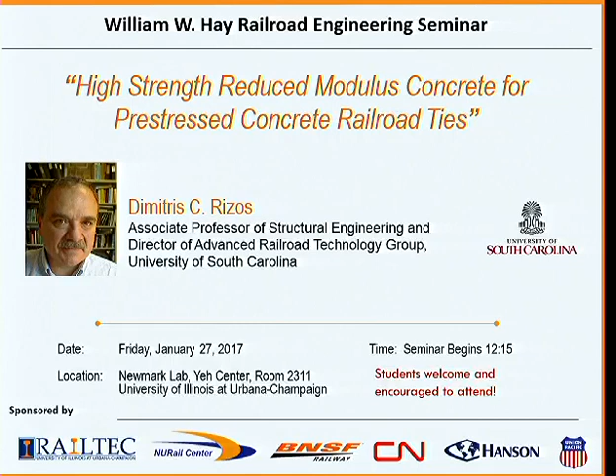Here's a quick overview of the university. We have 8 campuses, more than 45,000 students. The main campus is in Columbia, South Carolina. Beautiful places, smiling faces. Those of you who joined the JRC conference last year, we hosted it. We're very proud of you for being there.

So 14 schools. It's breaking up, I think. We have more than 300 degree programs, 30,000 students in the Columbia campus, and approximately 1,500 faculty. In our department, we have the main traditional areas: transportation, geotech, structures, water resources, structural engineering, of course, and railroad engineering, which is the latest addition to our program.

So the objectives were to establish a nationally recognized research and education program in rail engineering that is a nucleus of excellence within the department in USC, and to support the industry and promote railroads both in South Carolina and the US.

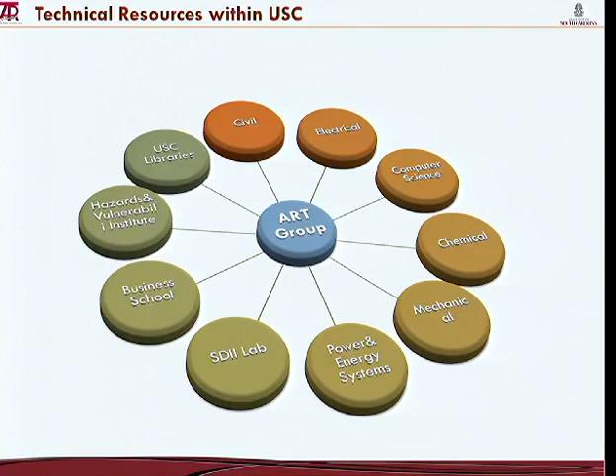The ART group stands for Advanced Railway Technology. A little bit on the history: the seed was planted in 2008, and we used, at the time, a proposal to NSF on high-speed rail vibrations to develop methodologies to predict them, basically.

To start doing... That's the train coming. No. So, can everybody hear me now? Better? I can yell if needed.

In 2010, a catalyst was the REES symposium, which I think was here in, it was in Kansas City actually. And the JRC that year was also here at Illinois, where I was asking questions: where can I get material to teach railway vibrations? And one thing brought the other.

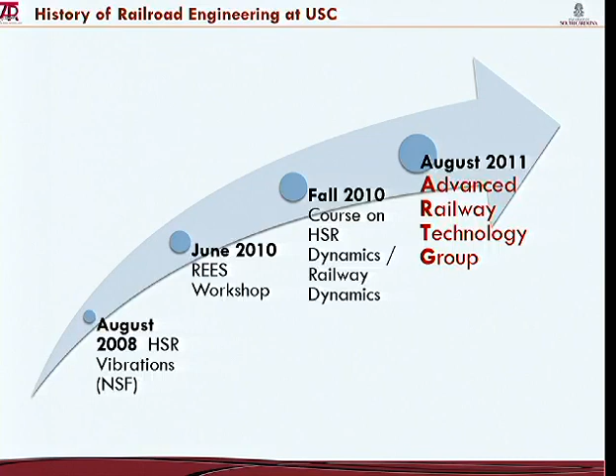Before we knew it, we embarked on a trip that was both adventurous but also very satisfying and rewarding. Fall 2010, the first course in high-speed rail dynamics was introduced in the curriculum. August 2011, the group was formally, officially formed.

We spent the first year establishing and developing our curriculum, building a research program and getting a little bit of funding in place. Since 2015, we have advanced degrees in rail engineering: Masters of Science, Master of Engineering, PhDs, as well as a graduate certificate, a 12-credit-hour graduate certificate offered online.

So these are the courses, real quick, that are available and the semesters they are offered. The first group of courses are directly related to rail engineering, dedicated to rail engineering. The last group, multimodal transportation systems management, risk analysis, and human resources, have rail components, and all are part of a graduate certificate as well.

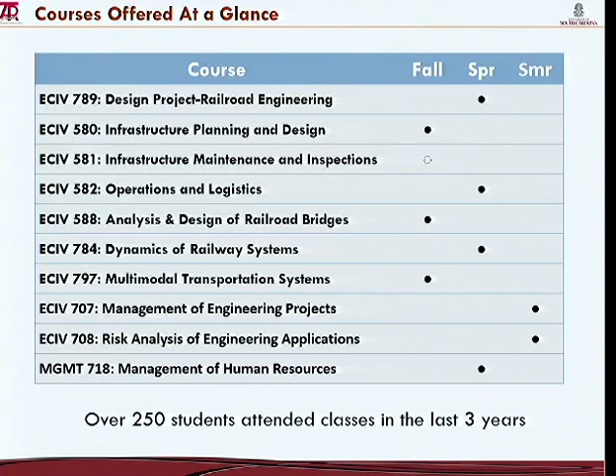We had over 250 students who have taken the courses in the last three years. As I mentioned, all these courses are offered online through our Apogee program, which is a program of graduate engineering education. It was probably one of the first programs in the country back in the early 80s, and at the time the operation was through videotapes.

Nowadays it's live streaming and also available at any time on demand. We also follow the model where the instructors don't have to be in class, so we do have remote delivery of lectures.

Some of our research facilities, especially all the resources that contributed to this project: our structures lab, of course, doesn't compete with what you guys have here.

I mentioned a couple of people had been to the lab about 20 years ago. Today, when I revisited it, I remembered why I was impressed at the time, and I'm still more impressed today.

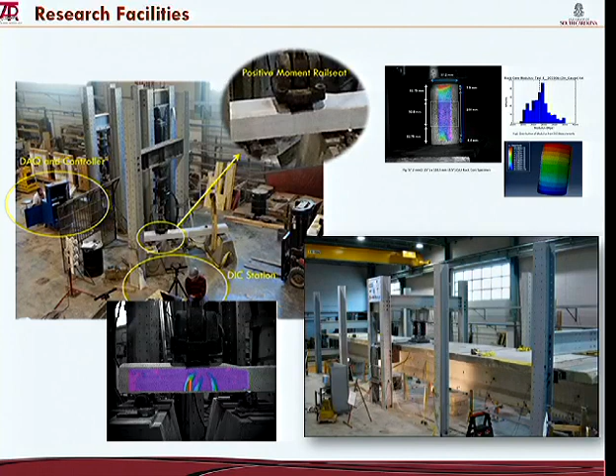We do have the capabilities for full-scale testing, some tie testing that goes on here. We have advanced measurement systems based on digital image correlation techniques. We'll talk a little bit about this - we use it both on large-scale specimens and also for material testing. And of course, all the computing, modeling, and simulation capabilities.

A couple of words on the digital image correlation system that we used. These systems are for 2D and 3D visualization and image correlation. This was developed at the University of South Carolina about 30 plus years ago by Professor Mike Sutton in the mechanical engineering department.

Of course, this technology moved into the industry. Correlated Solutions is a spin-off company out of this technology, and we're using their software and hardware for our testing. So it's a proven technology that has been applied to other industries like, for example, aerospace. Boeing is in Charleston doing a lot of work with measurements.

The typical 3D system consists of 2 cameras and a computer setup, as shown here. It seems like a simple configuration, and it is. The procedure to analyze the data, of course, is what makes the difference between different systems available in the market.

What is common is a speckle that you need to apply to the surface you need to measure. In this case, we have our sample, and the cameras are looking at the sample. It's pretty much like human vision, so you need to focus on the specimen. You need to keep the relative distance and position of your eyes fixed to a specific point. Otherwise, you lose the information.

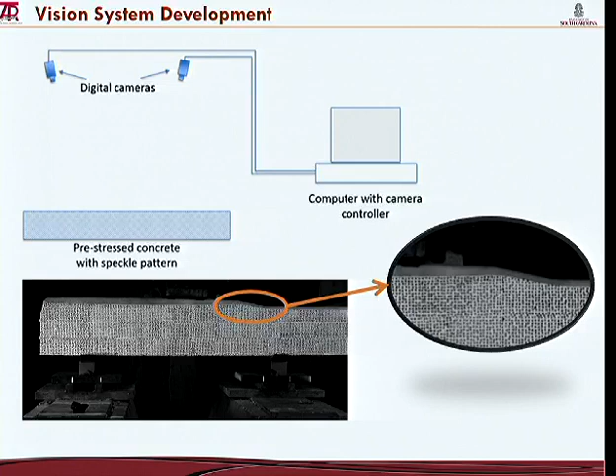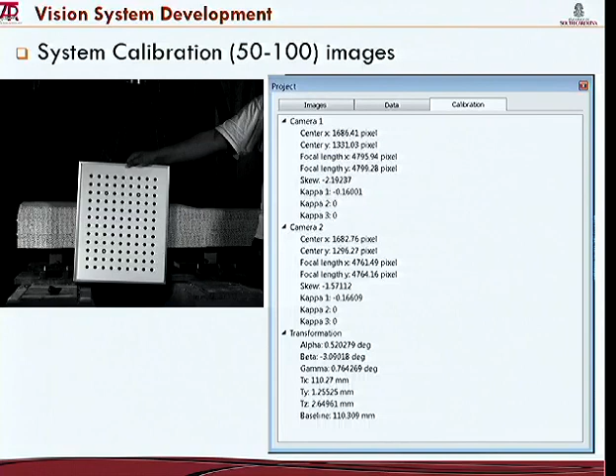The system is calibrated, and you get all the geometric parameters of the cameras as far as location, orientation, angles, and so on. The procedure works with 2 cameras taking images of the same specimen, same field of view, or at least a very similar field of view, same object.

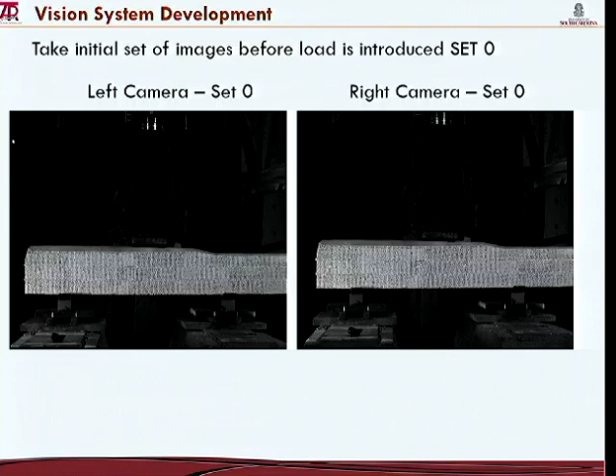Once the system is calibrated, the first set of images is taken at the undeformed or baseline state. Then you load the specimen, creating a deformed configuration, and then you correlate the 2 images. Pretty much you're tracking, not dot by dot, but in a statistical way, a number of points within a square, and you move that across to track them in space.

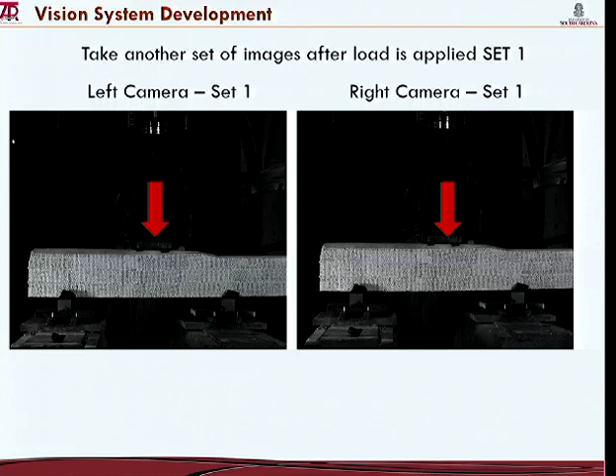You compute the full 3D field, so we compute displacements in all 3 directions. Of course, you can post-process them and compute the strain fields. This has been used extensively and has been validated in the lab.

Here is one of the validation tests I will show you today. This is a prestressed prismatic beam, and the objective is to measure the strain on the top surface of the beam when the strands are released. These are small strains, so you need an accurate and noise-free system to get the required accuracy.

The cameras are attached here on the top. Here's a detail of this: 2 little tiny Point Gray cameras shooting straight down into the face. They don't have to be perpendicular, unlike the restriction with 2D systems.

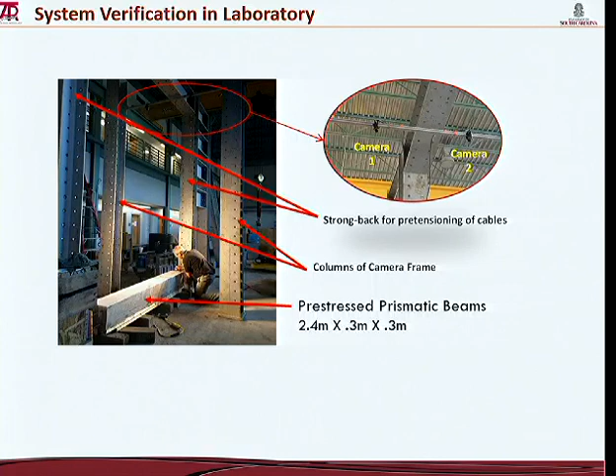We take a set of images before the strands are released, after the concrete has cured, and then again after the strands are cut. In this test we had a flame cut — we had to flame cut the strands — and these are the images that were obtained, where the top 2 strands were cut first, and then all 4 strands were cut.

Average strain was 110 microstrains in the first case, 180 in the second case. So here we're talking about real low strains.

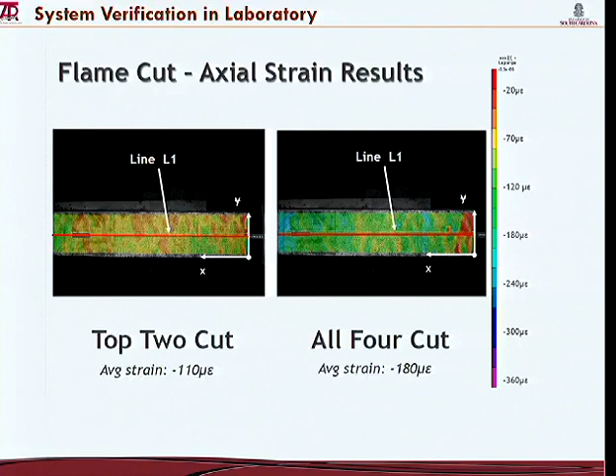Now, if we plot the strain field along the center line shown here, line 1, the blue dots or triangles show the strain results, and the solid line is an average. The bottom line is for stage 1 when the 2 strands are cut, and the top line is when all 4 strands are cut.

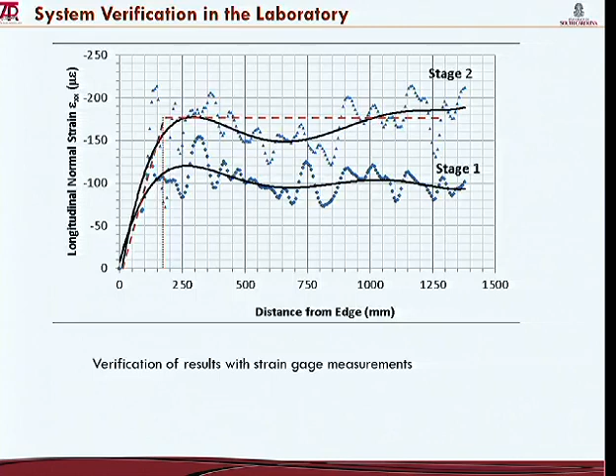These numbers have been validated with strain gauge measurements — of course, strain gauges are like spot measurements.

With finite element analysis of that same specimen, this graph shows the longitudinal strain once again along that line as a function of location from the live end of the specimen. The dashed line is the finite element solution, and the solid line is the DIC average value of this data.

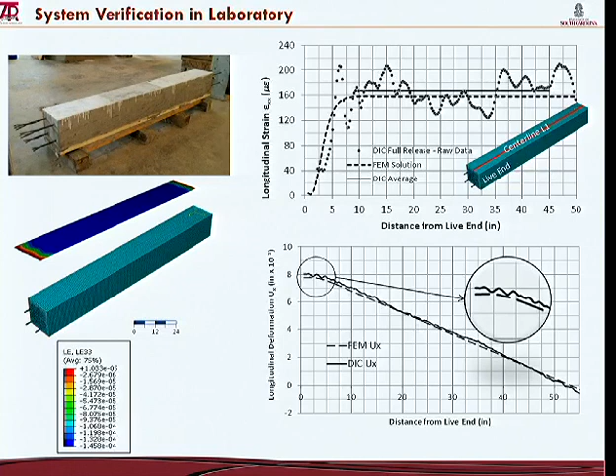And when we look at the displacement, the longitudinal deformation up to the midsection, this is pretty much what we captured here — we see the accuracy of the method.

Now that this measurement technology was introduced, I would like to discuss the design of high-strength and low-modulus concrete crossties, a project funded by the Federal Railroad Administration, now in its third year. We'll touch on the historical background and how the idea came about, the hypothesis, material development and characterization activities, the design and fabrication of prototypes, testing and qualifying the product, and then demonstrate the benefits of this product through a series of investigations.

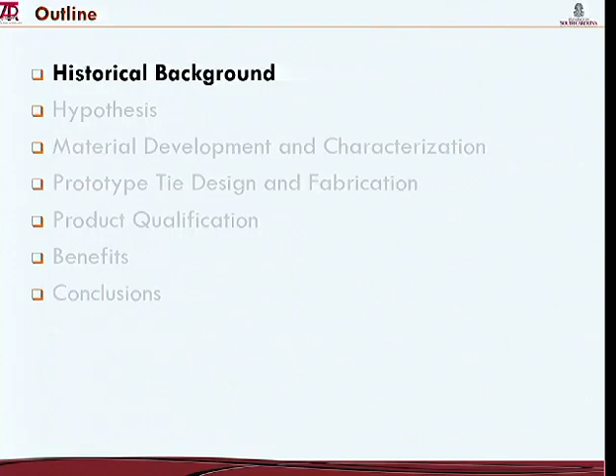Some history on the project: back in early 2000, we at the university were part of a team investigating different concrete mixes to qualify them as high-performance concrete for highway bridges in the state of South Carolina. We used local aggregates and standard South Carolina DOT mix designs.

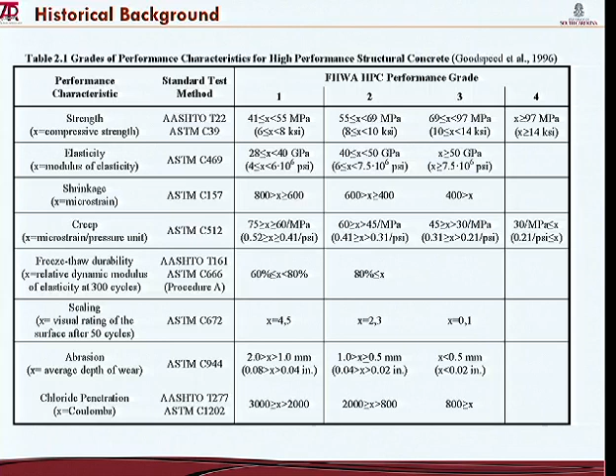Based on the classification for high-performance concrete, the material is classified into four grades based on different properties. What we found is that certain mixes, using aggregates from certain sources, satisfied most of the criteria for grade 1 or 2, except the modulus of elasticity, which was 30 to 50% lower than expected. However, the strength of that material was up there along with all other batches.

So at the time, that material was rejected. Later on, when I started getting more involved with the rail industry and found out about the cracking problems in ties and so on, the idea came about: here I have a product that can produce a more flexible structural member, as strong as the concrete already used. So maybe it's worth investigating this material and finding out how it performs in a system.

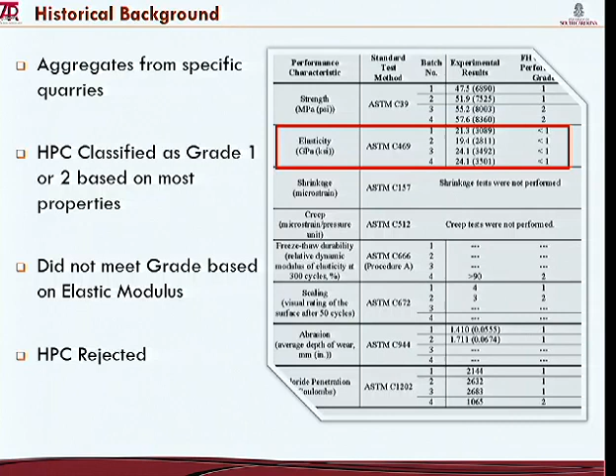Some graphs from this old study, early 2000s, about 10-15 years ago. This top graph shows the correlation of modulus of elasticity with compressive strength for two groups of data. This group is what we call unweathered aggregate, or the standard aggregate that's used - these are granites. This data had to do with batches that did not produce the expected modulus of elasticity, and we found out that all these aggregate sources came from quarries where the granite was weathered.

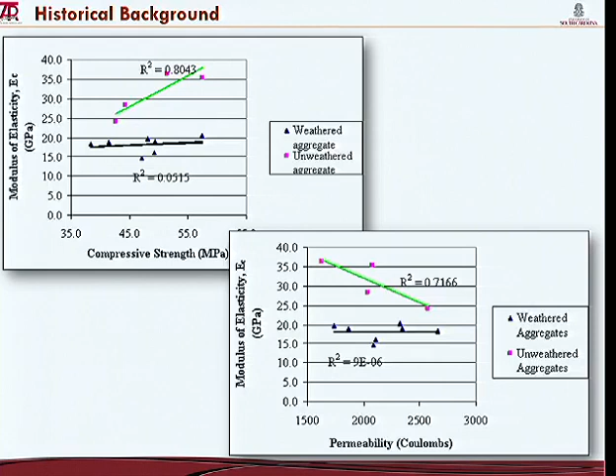Correlation of the modulus of elasticity to permeability - again, no correlation for weathered aggregates, and correlation as expected for the healthy material. So the hypothesis is that if we use such a material with high strength but reduced modulus in a concrete tie, we'll be able to get a better load distribution within the tie, smoother stress gradients because of the higher flexibility, lower stress amplitudes, delay the onset of cracking, and improve the relative rigidity between the ties and the ballast.

Some preliminary studies based on finite element analysis alone show that if we reduce the modulus of elasticity by 50%, then we can reduce the stresses from 15 to close to 50% at different critical locations related to the rail seat, center bending, and under the rail seat at the interface with the ballast.

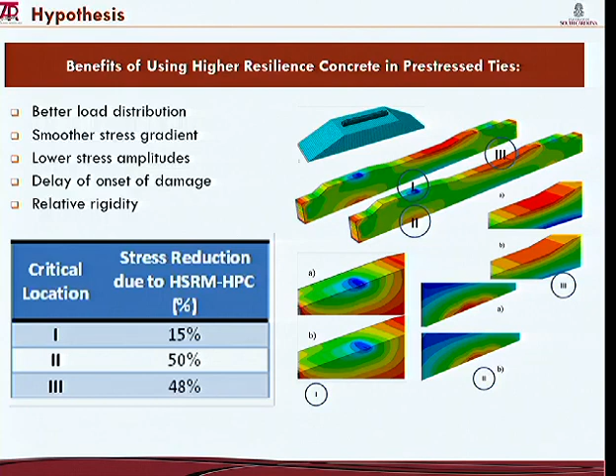So here we departed on developing the material. Major tie manufacture design - the only thing we changed was direct substitution of a material. We just wanted to change one parameter to make sure that what we record in our studies makes sense, and we can find out why.

So the specs: minimum 28-day strength 7 KSI, and strength at transfer 4 KSI. We did direct substitution of aggregates and considered 4 aggregate sources. CA1 is what is used by the manufacturer - that's limestone - and CA2 through CA4 are the weathered granite from 3 different sources.

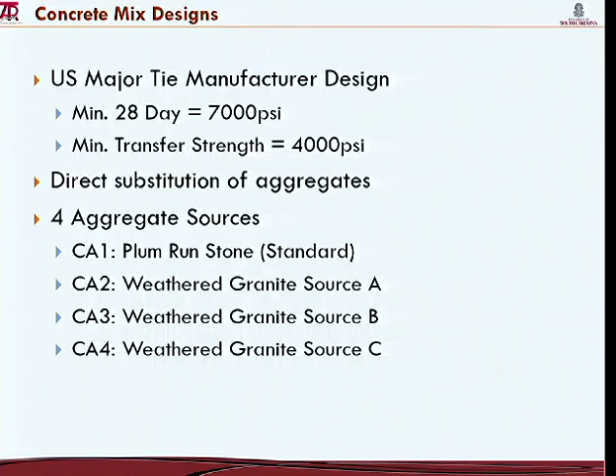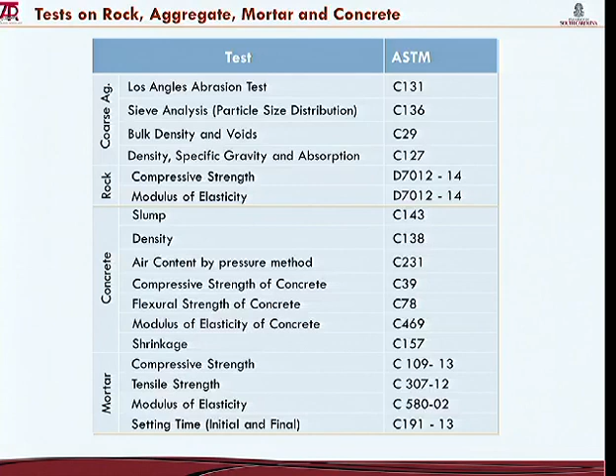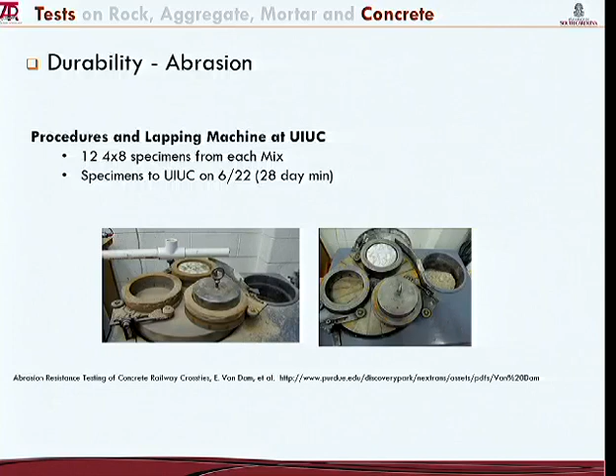In addition to the standard ASTM tests, we did some abrasion tests here at UIUC, and we'll see the results in a second. So this is what we got from this first trial where we mixed the different batches.

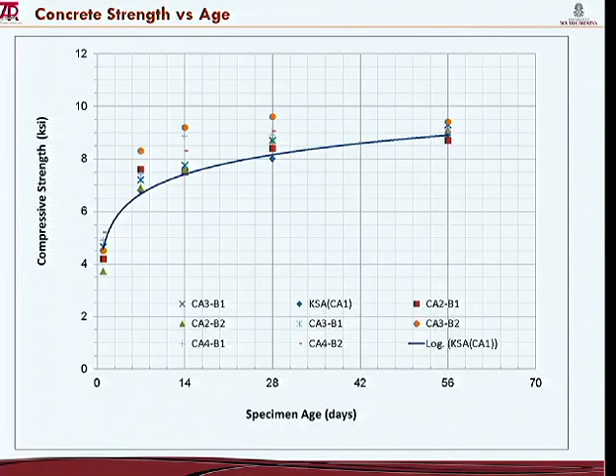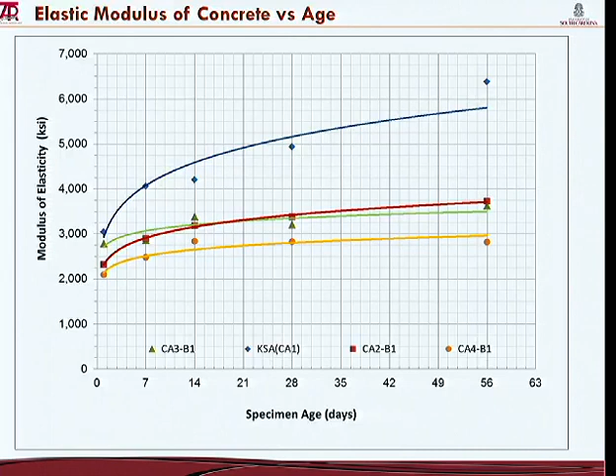When we looked at the modulus of elasticity versus age, we see that the standard design modulus of elasticity follows the trend in the models that we're all familiar with. However, for the weathered granites, the modulus did not pick up. At early times you see a relatively small difference between the moduli, but it seems like a good wine - the older it gets, the better it behaves. So we see higher reductions at later times of the modulus.

Here's a correlation between the modulus and the compressive strength for our baseline, the standard mix, and the weathered granites. These data are plotted for strengths above 7 KSI, which is our design strength for the concrete batch, the minimum design strength.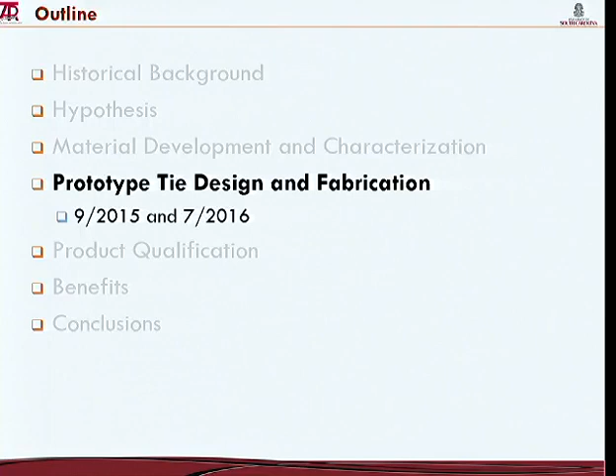So far we've produced concrete twice, one with reduced modulus, one in 2004 and then about 10 years later. Now we'll try a third and a fourth time, but this time we're not producing the mix, the plant will. So we produced ties in September of 2015 and July last year.

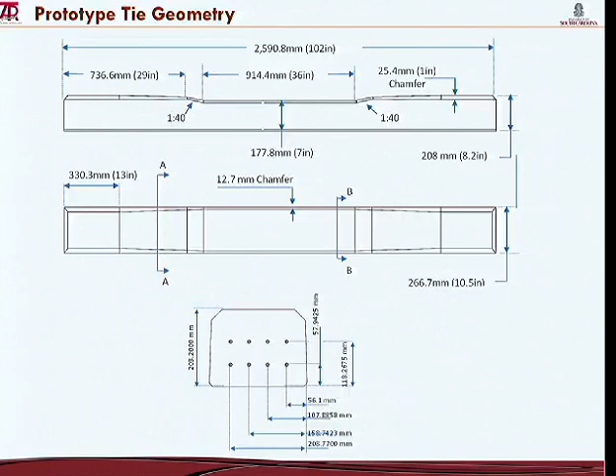This is the geometry. 8 7-wire strands is the reinforcement here, and this is at the plant the first time we visited. The cavity is filled with concrete.

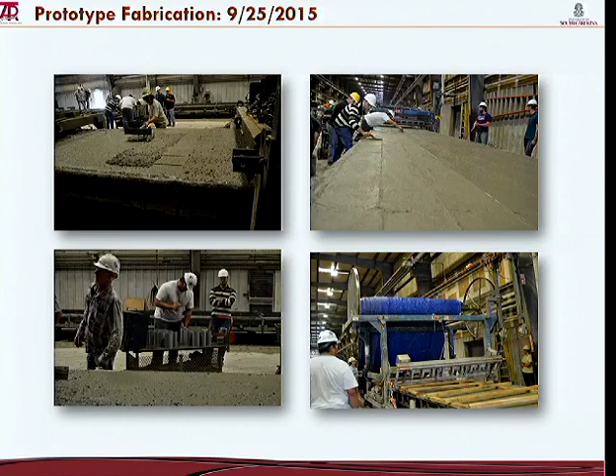Here we do some surface preparation because we will be using DIC measurements to obtain transfer lengths, taking material for testing samples. This is the team with my students. I'm very proud of their work.

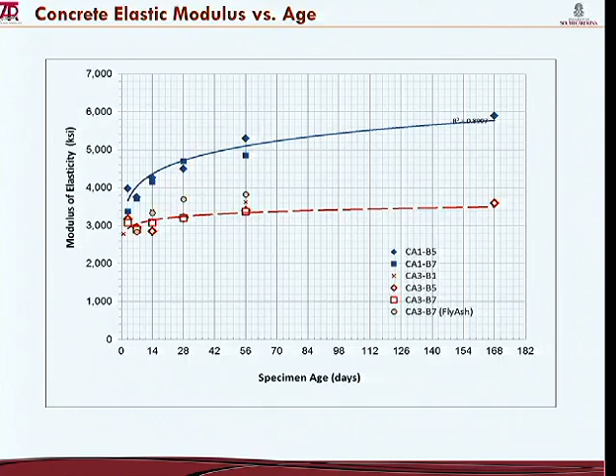And this is the concrete with the weathered aggregates. In these numbers, we also have included one of the batches from our lab testing, just to make sure that we are in the same range of values.

Correlation, same findings as before. One thing that we tried in our second visit, we also produced a batch where we included fly ash in it. This is very limited testing. We're just looking into different possibilities here, moving this work forward.

So next, I would like to show you the measurements of the surface strains. This is the cavity or the bed, the pre-stressing bed, and mix one is the reduced modulus ties that we will be monitoring with DIC.

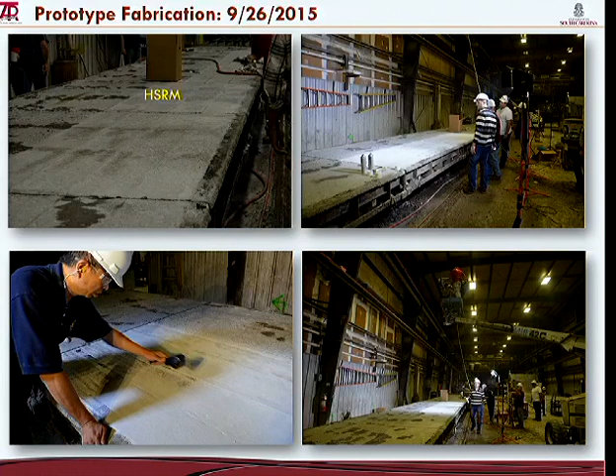So surface is prepared. We see the lighting. We apply the speckle here with a roller, and the system is attached to the lift here. This is a detail, about 17 feet above the surface of the ties, a well-lit surface, and images are taken before strand release and after strand release.

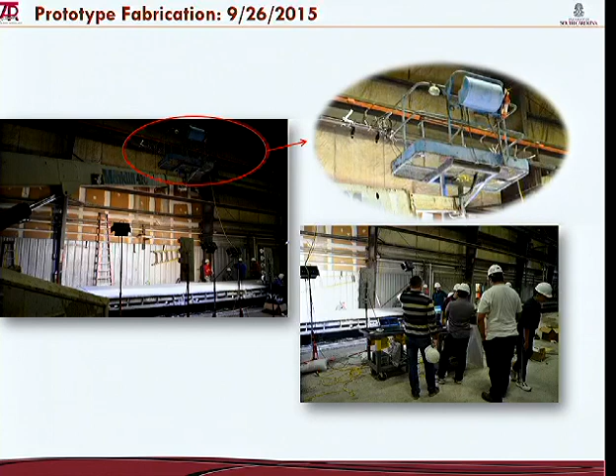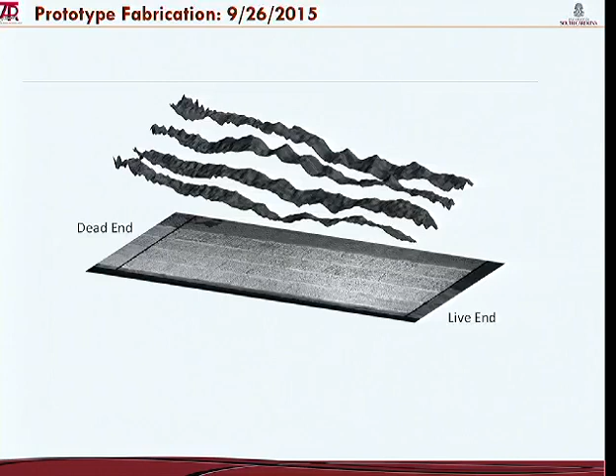One would expect a little bit of a flat area where the transfer length is, and then a straight line, and then flat area again. But we did see some sort of an anomaly.

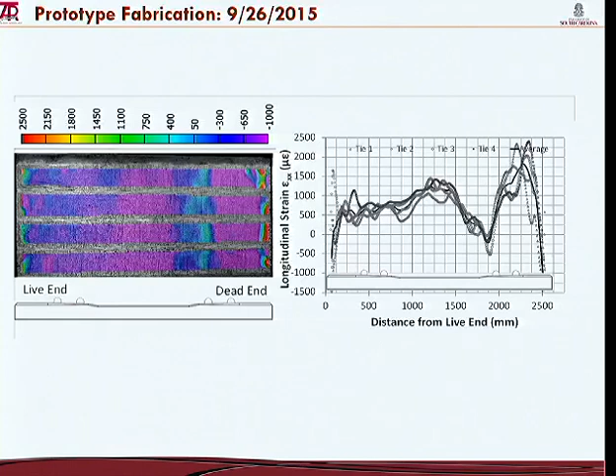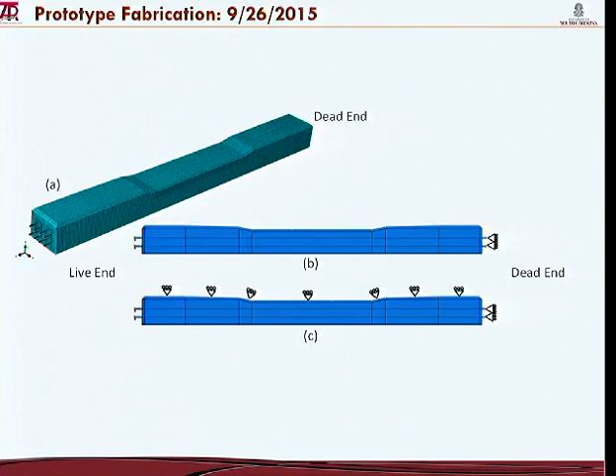So the hypothesis here is that the form is catching the tie, and the form effects need to be also accounted for when we do these measurements. So we tried different finite element models with boundary conditions where the form's boundary conditions are included. And also, let me go back to the image with the pre-stressing bed.

So we can find the stiffness of the form and include these effects. And if we look at the tie without any form effects, we see this nice profile as expected of the strains at the tie underside. But with the form effects, we get a pattern that confirms we were right in our hypothesis.

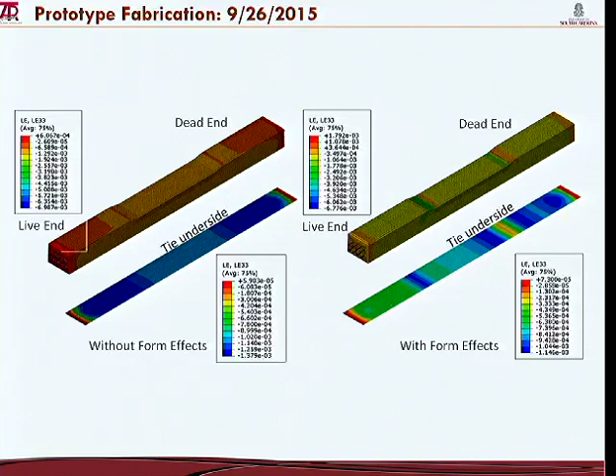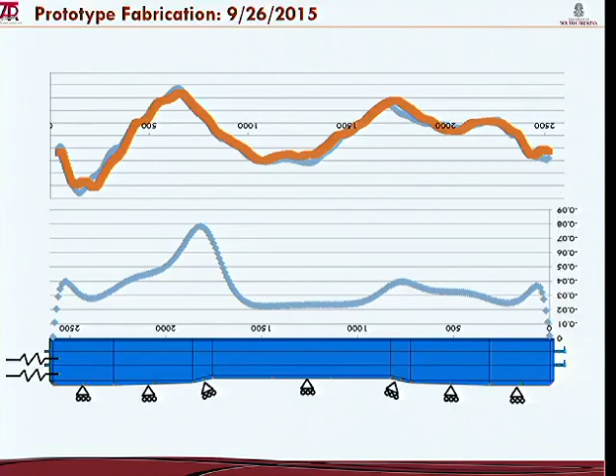If you look at the strain profiles as obtained through the DIC measurements and the finite element measurements, you see that there's something going on at this location, where the rail seat is. Again, direct comparison of the DIC color map with a finite element color map.

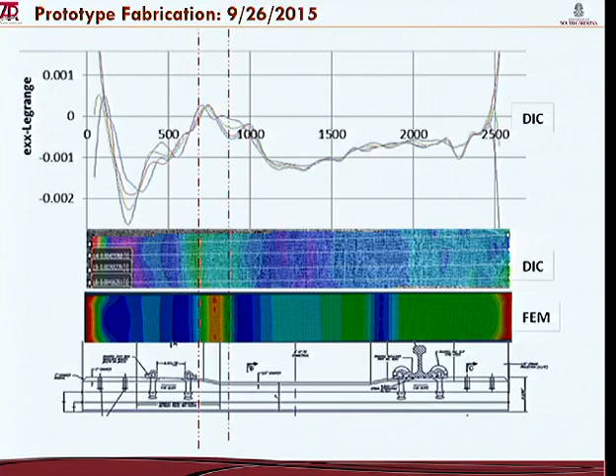We see these effects. Nevertheless, we were able to compute transfer lengths, and it seems that the high-strength reduced modulus ties did produce shorter transfer lengths than the standard ties, and also with a better coefficient of variation. These measurements were not only from our DIC measurements, but were also measured by an independent contractor who was there at the time, using a different DIC system, and also Whitmore gauges.

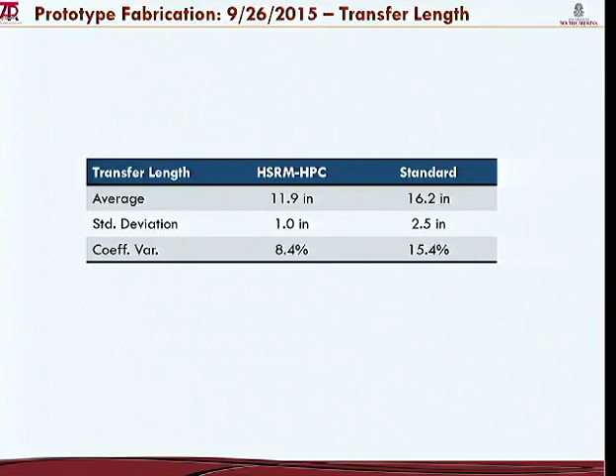So the product was qualified, following all the standard AREMA tests here.

For the rail seat and the negative and positive moments, here we're at the lab. A DIC system also was used for such measurements. The strand slippage was monitored, and the slope deflection was also monitored in all cases.

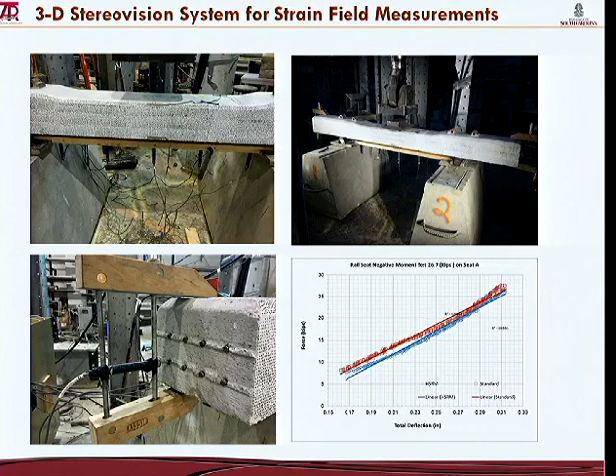We've obtained thousands and thousands of images. I'm just going to show you just a few here, so that everybody can see the benefits of using digital image techniques in strain field measurements.

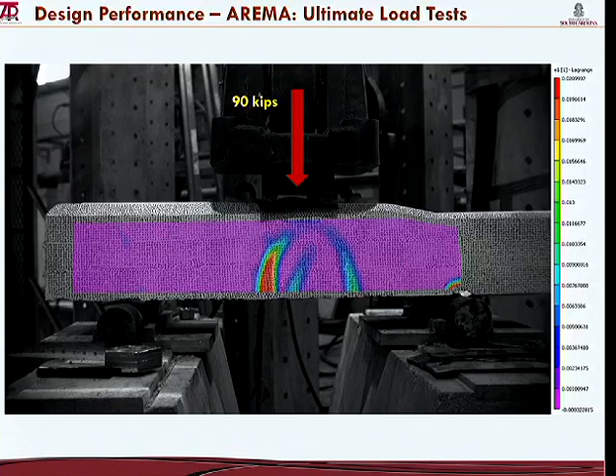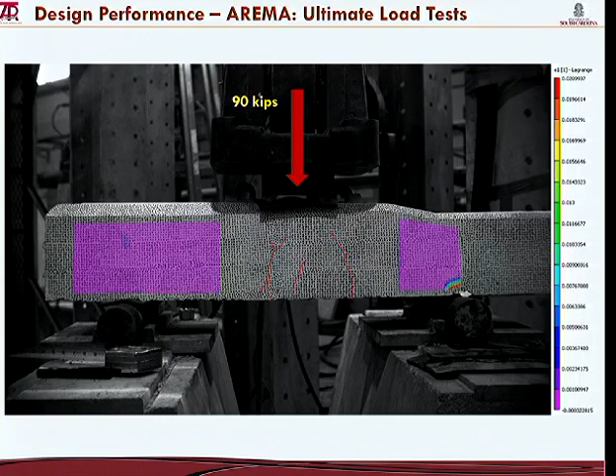At 90 kips load, which is approaching the design ultimate capacity, we see the cracks. Clearly can see the cracks developing on the tie. I just removed the color map, and these are the cracks indeed underneath. We can do all sorts of things in actually measuring and tracking how these cracks open and close through the DIC measurements.

Bottom line, the high performance, high strength reduced modulus ties all passed the qualification tests. The standard, there was one that marginally passed, and we were probably within 1% of the rail seat moment positive value.

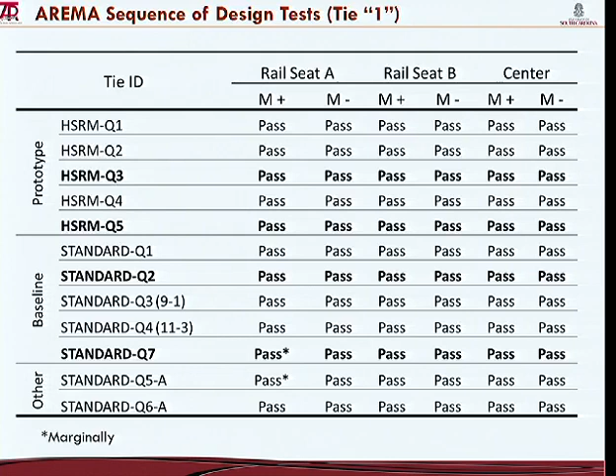Now, when we drove the test to failure, for the prototype ties, the pre-stressing strain is approximately 800 microstrains, 760, 770. And the crack is computed based on the flexural strength to about 320 microstrains, where for the baseline, it's 500 microstrain pre-stressing and 220 microstrain for the crack flexural strength.

So in order to crack the specimen, we need to monitor strains for the HSRM above 1100, and for the baseline above 700. Because remember, the DIC assumes a zero position when the pre-stressing is already applied. So whatever may be monitored or recorded as tension in the DIC, it's not really tension—we have to add the compressive stresses due to pre-stressing there.

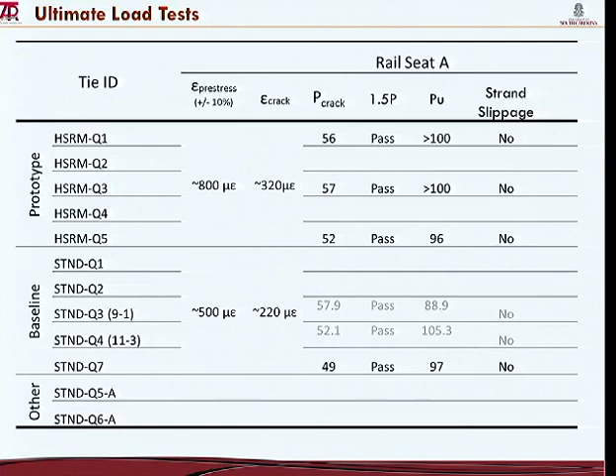Testing that was conducted here at the Railtech facilities on the fastener pull-out and torque test—all the ties passed. Fastener uplift tests—the ties passed.

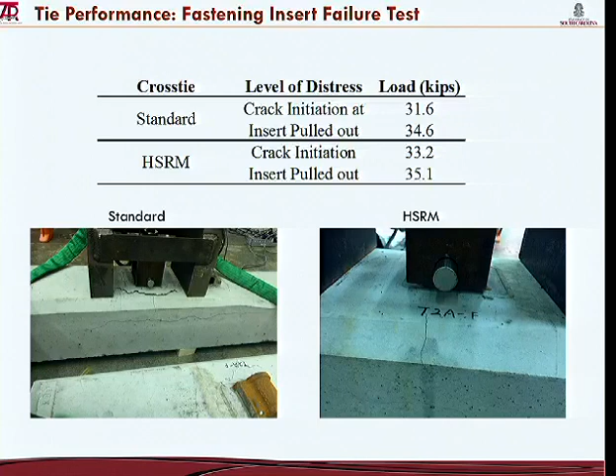We'll discuss the cracking patterns again when we do the benefits now. So now that we have a good product, how am I doing in terms of time?

So now that we have a good product, some variable support testing was conducted here at your facilities at Railtech, for under full support and support conditions that will cause center binding. And of course, as expected, the HSRM is more flexible, so higher deflections, with slightly higher deflections as shown here as a function of distance from the center of the tie.

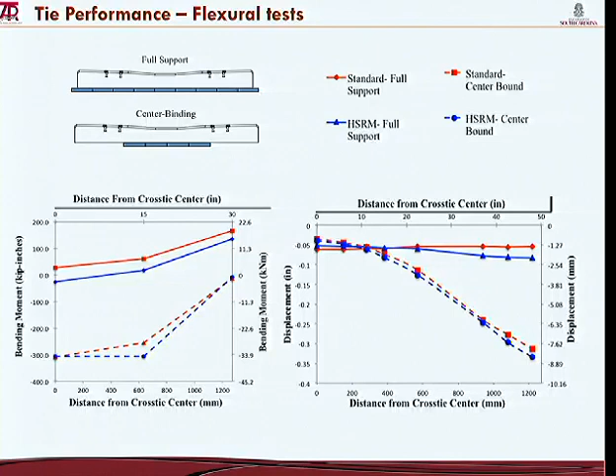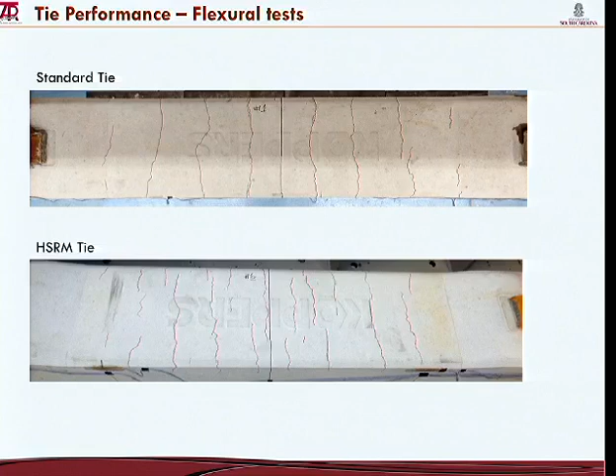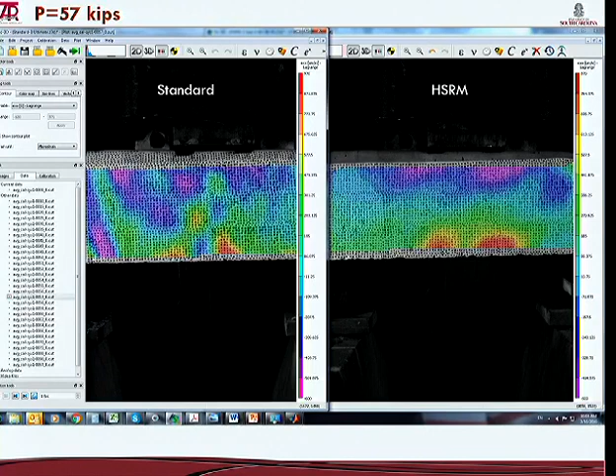Now 57 kips, clearly stress concentration. Then we see two areas of high stress, and the values here are still at 870, and no crack had been monitored. It's just the way the load is being redistributed. 60 kips, same story. Now the crack starts propagating, the load gets distributed, and this time, now we look at the strains here.

We jumped up to 4,000, 4,000. Here's a crack. As the load progresses, we see two cracks, very distinct cracks in the standard, multiple cracks in the HSRM. When we plot this to the same scale, notice the opening here is much higher than the HSRM. So this color map axis - going too fast there - were plotted to the same scale.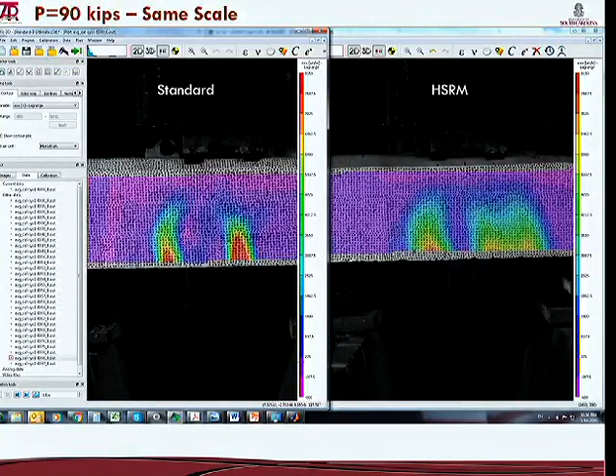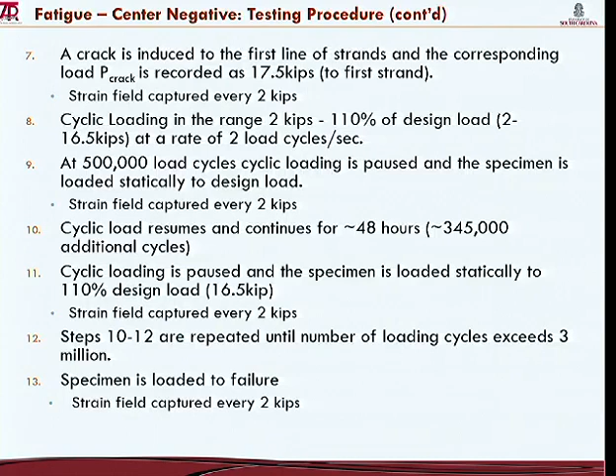All right, then we tested the specimen in fatigue. There was no established procedure for this, so we did 3 million cycles, loading to 90% of the design load, monitoring the strains. Then we induced a crack, loaded the specimen another 3 million cycles, and at the end we loaded the specimen to failure. So stage 1, no crack, 3 million cycles.

This is the 0 cycle, at 13.5 kips load. 500,000 cycles, 838,000, over a million. So you see that the strain pattern does not change. No effects here of fatigue load. So no significant change in the strain field as load accumulates.

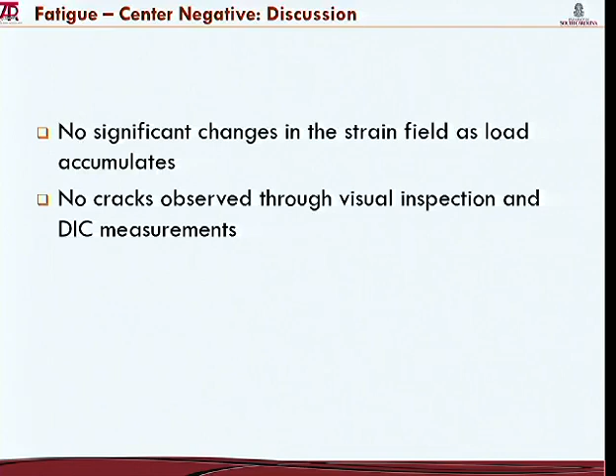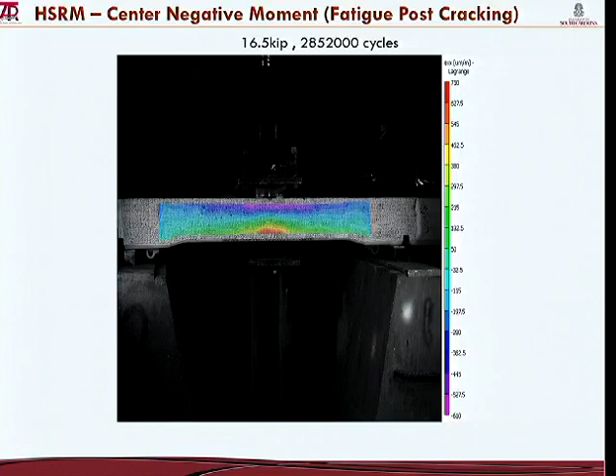No cracks observed. Stage 2, crack the specimen, another 3 million cycles. So we can see here the evidence of the crack. As the number of cycles accumulate, load is always 16.5. Notice that the crack propagates a little bit, but then it stops, and notice how the strains spread out. So we have load redistribution, which is a desirable effect. This is what we would like to see. And then that's it - nothing else happens to it, so the performance is maintained.

So stage 3, loading to failure, 0 kip. Now remember, this is already pre-cracked. This tie is already pre-cracked, so there is 1 crack at that location. At 6 kip, 8, the strains are still low, right? 290, which means that the crack is still closed because of the pre-stressing force. 12 kip, 13.5, 15 kip, 16.5 - still pre-stressing is high enough to keep the crack closed.

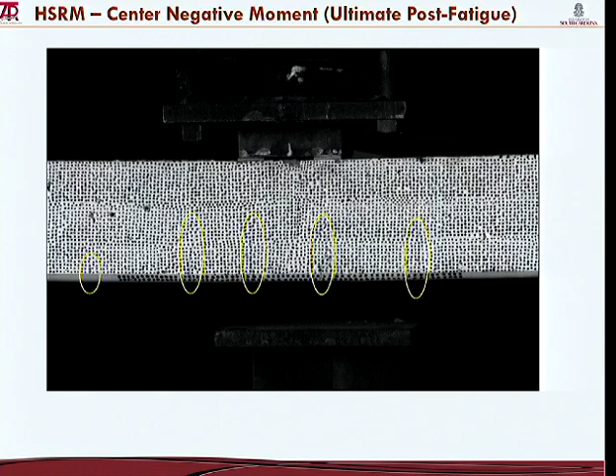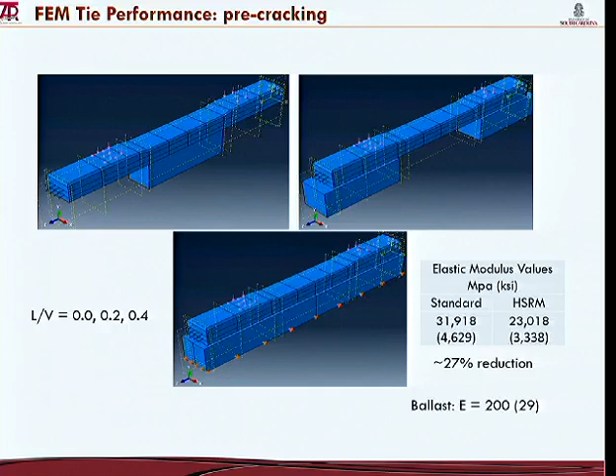Parametric studies through finite element analysis. I'm not going to bore you with the details of the model, but the findings - basically what we did here, we took the values straight out of our lab testing measurements, and we also applied some lateral load, L over V, 0.2 and 0.4. And the HSRM showed anywhere from 3 to 12% lower stress. This is ongoing work, we just started it. This is still linear. We're moving into looking into the post-cracking behavior.

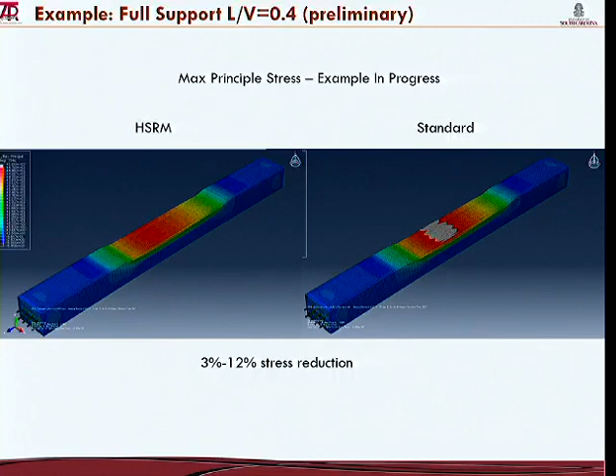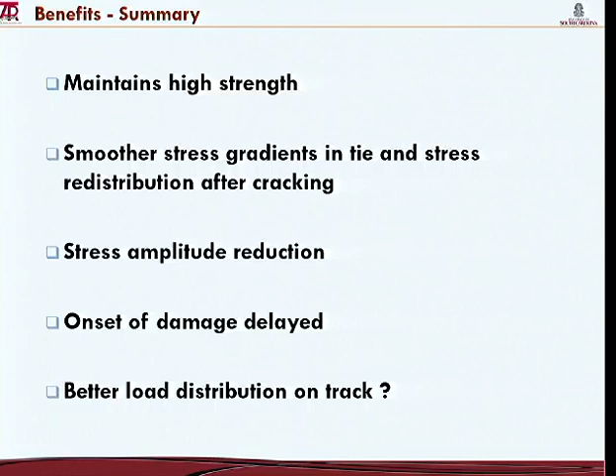So benefits, in summary: the new material maintains high strength, smoother stress gradients in the tie, and stress redistribution. Stress redistribution takes place after cracking. Amplitudes of stresses are reduced. Onset of damage is delayed, meaning higher load to see the first cracking. And the next thing that we're looking at is better load distribution on the track because it's more flexible. So the hypothesis here, again, is that we're going to see a better distribution of the load on the track.

So conclusions and some future work.

We'll look at the residual strength, the post-damage performance. We'll do dynamic DIC measurements. We already started this with capturing images. I'm not going to show you an image because this is fairly new. We've done this the last month. We started the dynamic measurements.

High-speed cameras, anywhere from the lowest high speed, which is 38 frames per second, all the way to 10,000 frames per second. Loading rates from 2 to 15 hertz on the tie to identify the dynamic effects, and effects on load distribution on the track.

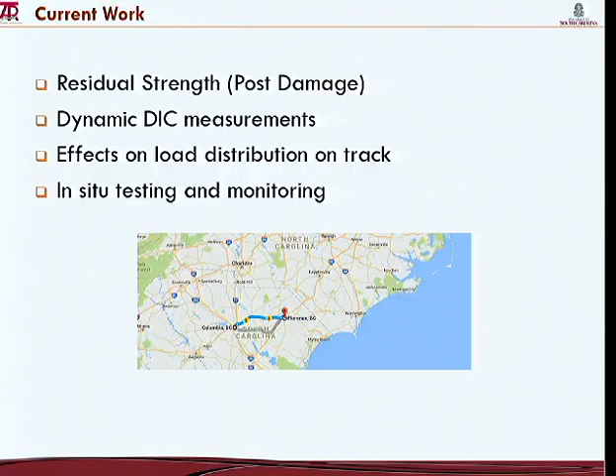On our sand pit in the lab, we'll set up a track and do the measurements. And we will be installing these ties on a CSX line, heavy haul, curved track, and monitoring their performance every 6 months for the next year and a half.

So it's a good product. We're happy to see the results. We've applied for a patent on this, and it's a technology-based modification in concrete tie that improves the safety of rail service and maintenance operations without impacting the fabrication and cost.

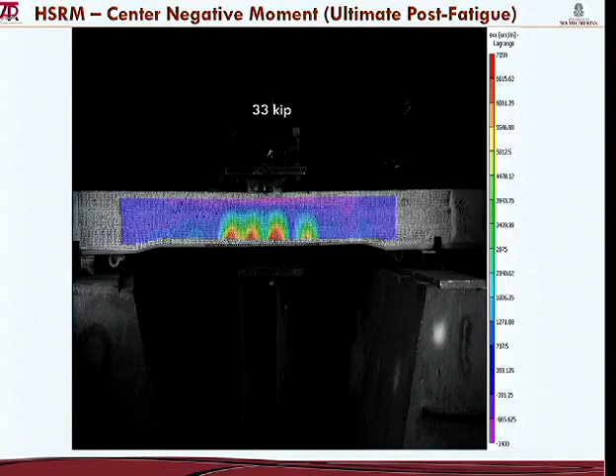Dimitris, very interesting presentation indeed, and good research. I was interested from the aggregates point of view again. Looking at some of the results of the standard and the 3 other granites. And you showed some LA abrasion results, which basically measures toughness and the breakage potential of the aggregates.

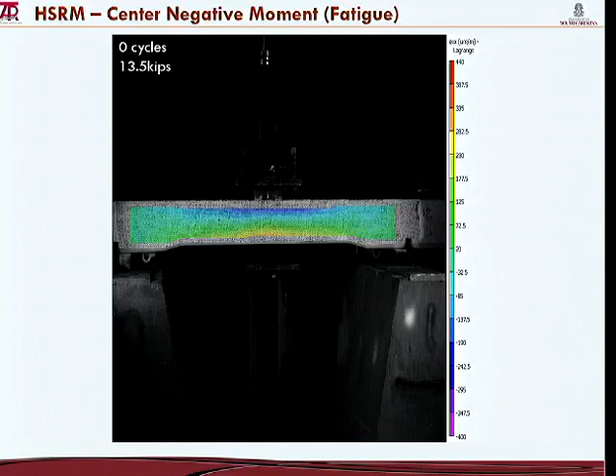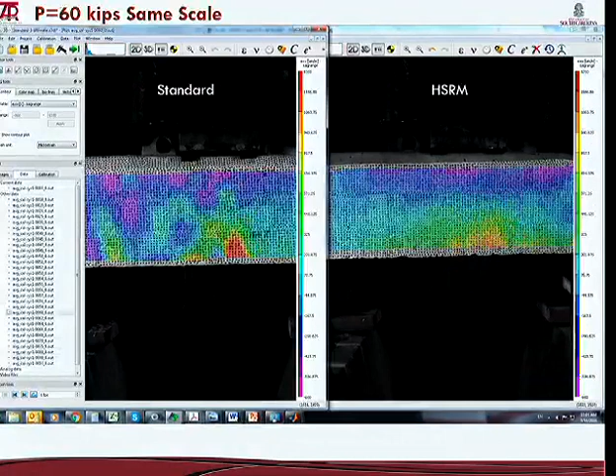I was wondering if you had a chance to also measure surface textures in any way. Or actually, I was thinking about offering you to run some of your aggregates through the image analyzer we have. Oh, that'd be fantastic. Quantify surface texture, angularity, those properties, which may shed some light on some of the modulus results differences. That will be fantastic. Maybe we can better understand the mechanisms, bond strengths, and things like those.

How much of the aggregate do you need from each one? Just a few of each, that's all. They will be in the mail on Monday. Perfect. All right. Thanks. Appreciate that.

Thank you. More questions? When we use the mic, questions are picked up, right? Yes. Yeah.

I have a lot of questions, but I'll ask one. Whenever you were in the plant looking at the stress, or the strain, how the stress or strains were changing, did you happen to look at any of the QA/QC of those specific ties to see if there was any differences, or moving forward, if you came to deploy that system, do you have any long-term vision of what that can go to do or what it can have on the time?

Well, Marcus, thank you for your question. It's maybe an hour answer, but I'll try to keep it short. This technology, I think the sky is the limit of what we can do with this. As I mentioned, this is a technology that's been developed for over 30 years. There's a company that produces the software and hardware.